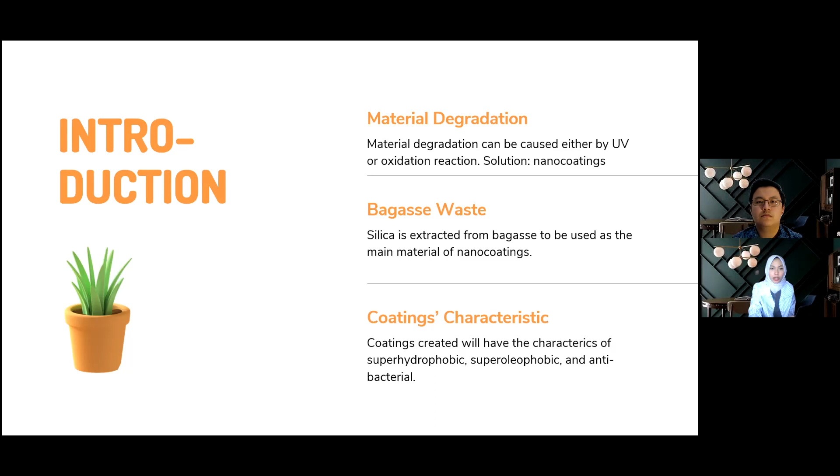In general, coatings are intended to obtain certain properties from the surface of material. Coating selection is based on its function, adaptability, level of adhesion required, availability, and also price. There are various types of coating techniques such as dip coating technique, spin coating, and also thermal spray coating. The dip coating technique is a coating method where a substrate is dipped and withdrawn vertically from the coating solution

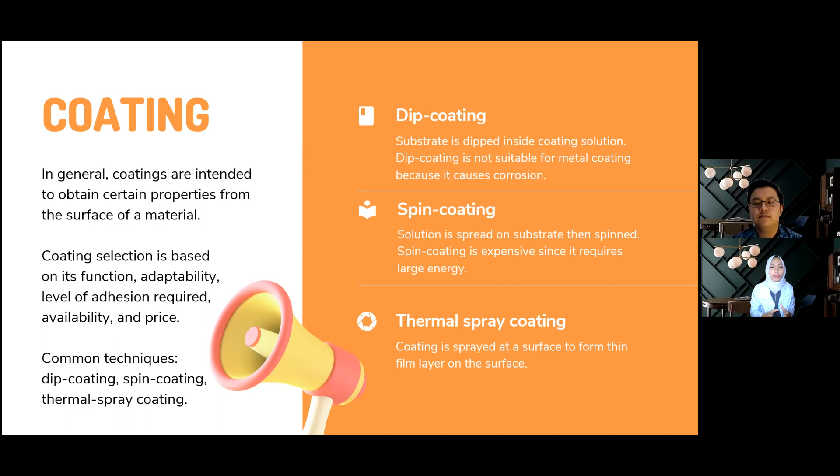at a certain speed. While spin coating is a method for depositing a thin layer by first spreading coating solution onto a substrate. While thermal spray coating is a process in which a material in the form of metal powder or wire is deposited in a liquid state on a surface that has been previously prepared to form a spray layer.

In general, wetting and adhesion interaction between water and surface can be classified into two types. First, hydrophobic, and second, hydrophilic interaction. Hydrophobic comes from the words hydro, or water, and phobia, or dislike, a nature that is not able to absorb and accept water. Meanwhile, the word hydrophilic comes from the words hydro, or water, and phil, or like, a property that is able to absorb and interact with water.

This paper recommends the use of silica as a coating material. Silica has the potential to be used as a coating material since it has good adhesion and good protective properties, making it possible to resist the diffusion of water vapor, ions, and oxygen to the metal surface. So, silica can protect the metal from corrosion.

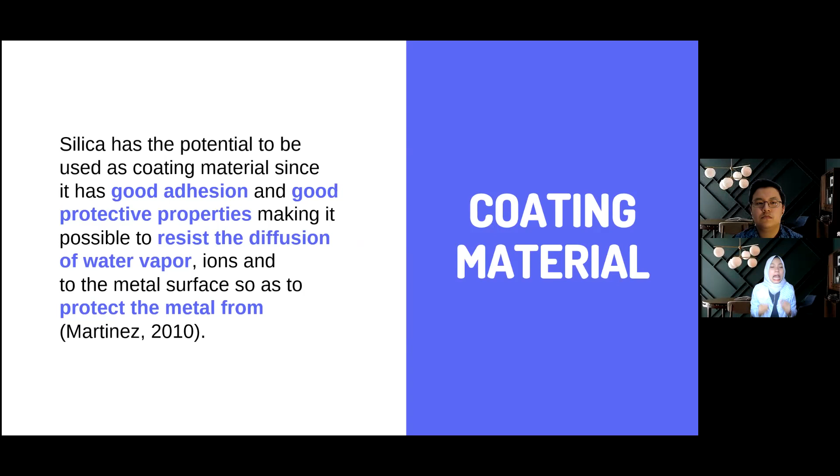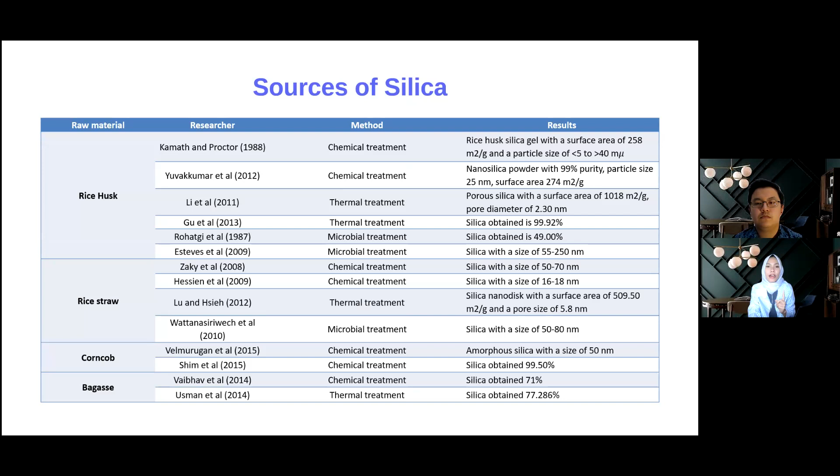This table summarizes the silica source, researchers, method, and silica isolation process results previously carried out. This paper recommends the use of bagasse as a source of silica. As you can see, the bagasse can produce silica up to 77%. There are three methods to isolate silica from bagasse. The first method is base extraction. The second method is co-precipitation. And the third method is solid-liquid extraction.

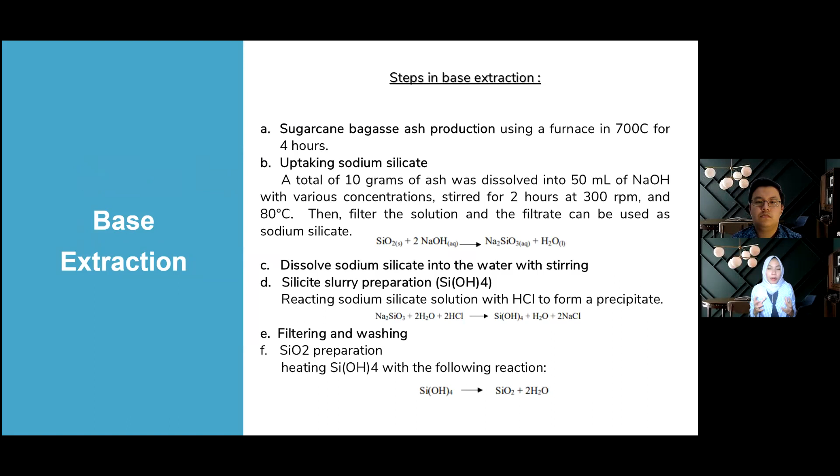Steps in base extraction include bagasse ash production, obtaining sodium silicate, dissolving sodium silicate into the water with stirring, silica slurry preparation, filtering and washing, and also silica preparation. Let's move to the second method. The second method is co-precipitation. The co-precipitation method is a method of synthesizing inorganic compounds based on the deposition of more than one substance together when they pass through their saturation point.

Co-precipitation is a promising method because the process uses low temperature and requires a shorter time, at around 12 hours. This method has so many advantages, such as low temperature condition, short time required, using easily available tools and also material, and also this method can synthesize flexibly.

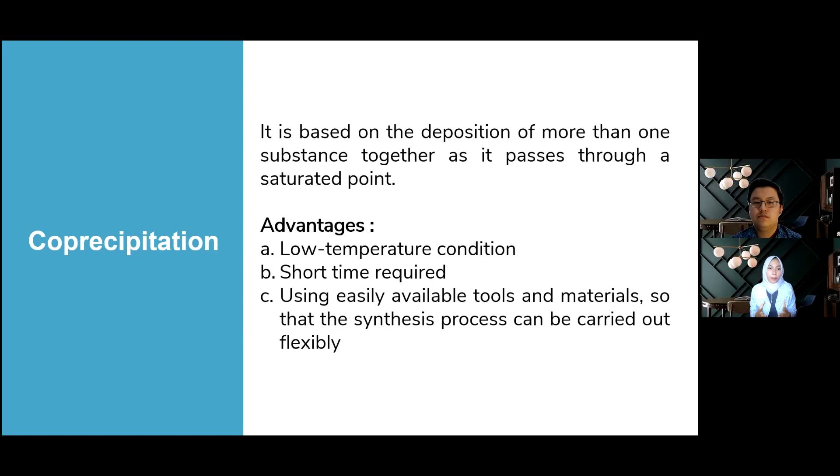The third method is solid-liquid extraction. Extraction of silica from bagasse can be carried out by a liquid-solid extraction process using an alkaline solution as a solvent. The silica compound that is formed is still in the form of potassium silicate solution. Hence, the solution is added with 1 N hydrochloric acid, which is used to bind potassium and produce silica.

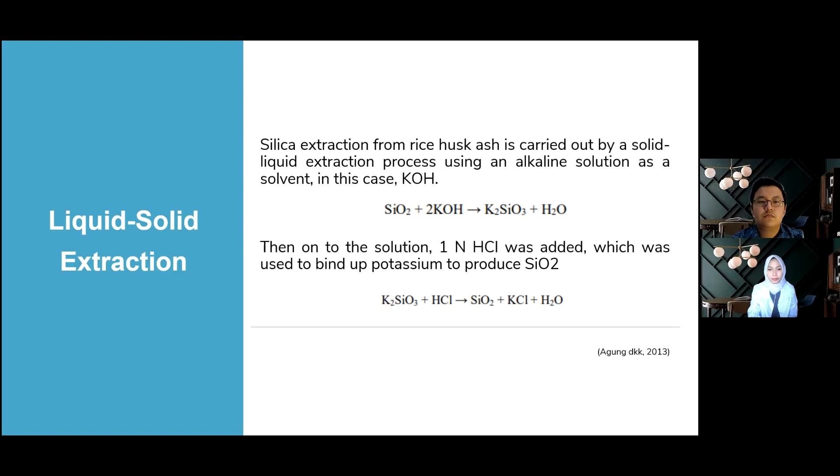Besides its simplicity to be isolated, silica is also inert, hydrophilic, has thermal and mechanical stability, and is relatively non-swelling in organic solvents when compared to solid organic polymer resins. However, silica also has a disadvantage since its active sites are only silanol and siloxane functional groups. This disadvantage can be solved by doing surface modification.

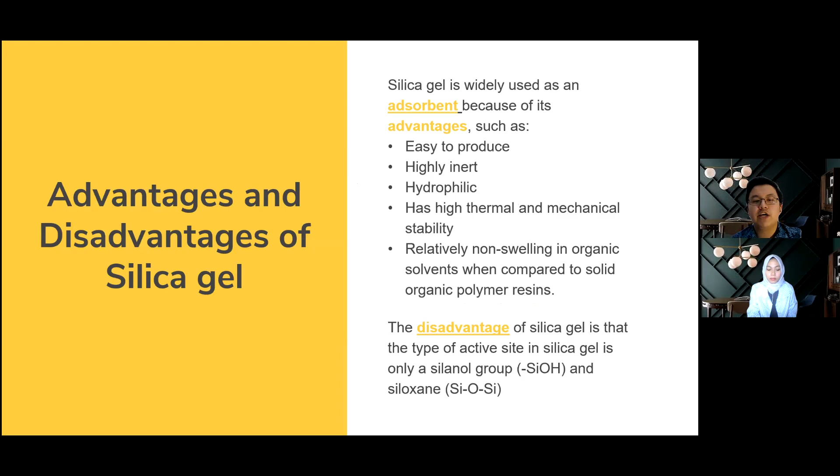The main purpose of surface modification is to change the chemical composition of the surface. Surface modification is done by changing the hydrogen atom in the silanol group into atoms other than hydrogen. The functional groups at the silica gel surface can be modified by impregnation or forming covalent bonds. In order to modify the active site, a substance called a modifier is used.

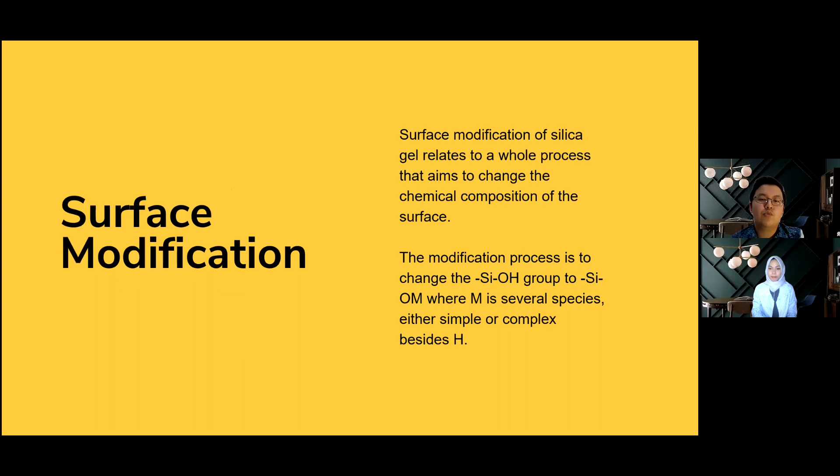An alternative modifier that can be used is vinyltriethoxysilane, or VTES. It has 3 hydrolyzable ethoxy functional groups and 1 vinyl functional group that are attached to the silicon atom. Vinyl groups added to silicon can improve the elastic and mechanical properties without much variation in density or thermal conductivity. The addition of VTES can also make the distribution of nanoparticles more uniform.

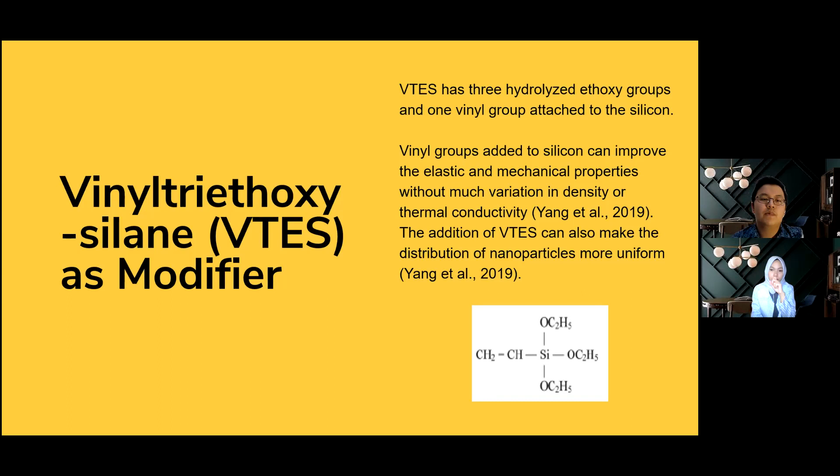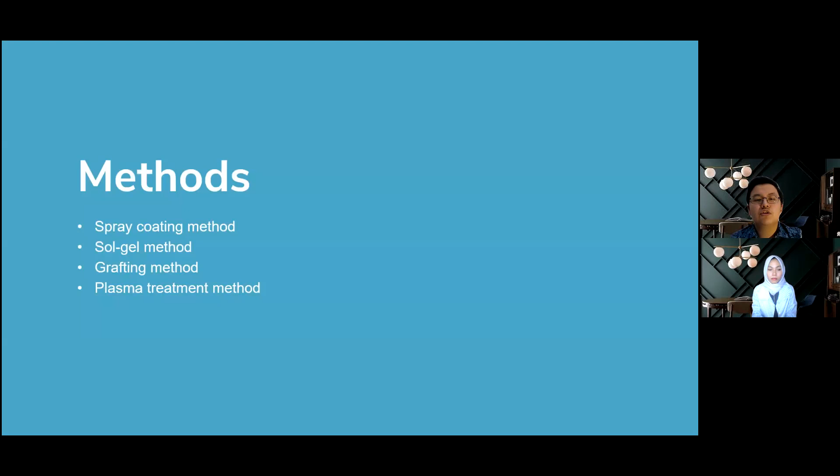There are several modification methods that can be used, such as the spray coating, sol-gel, grafting, and plasma treatment method. The spray coating and sol-gel methods are shown to be simple and effective ways, while in the grafting method, double bonds and branched nanosilica are covalently grafted to the surface. In plasma treatment, polymer surface properties are improved by applying reactive gases, plasmas.

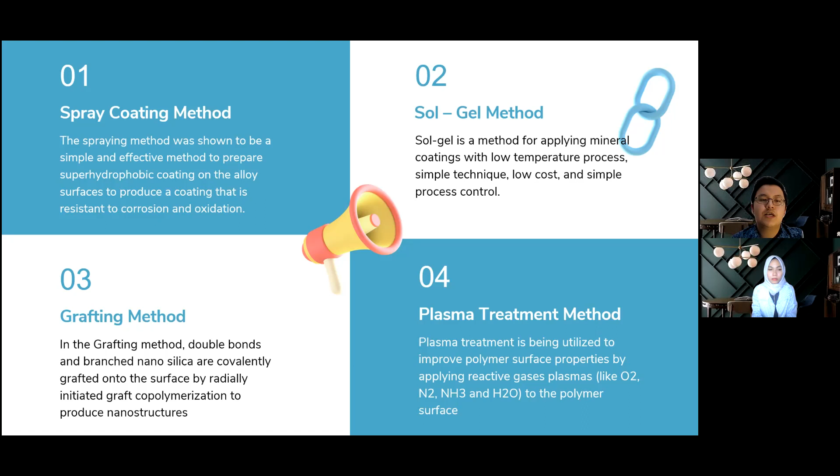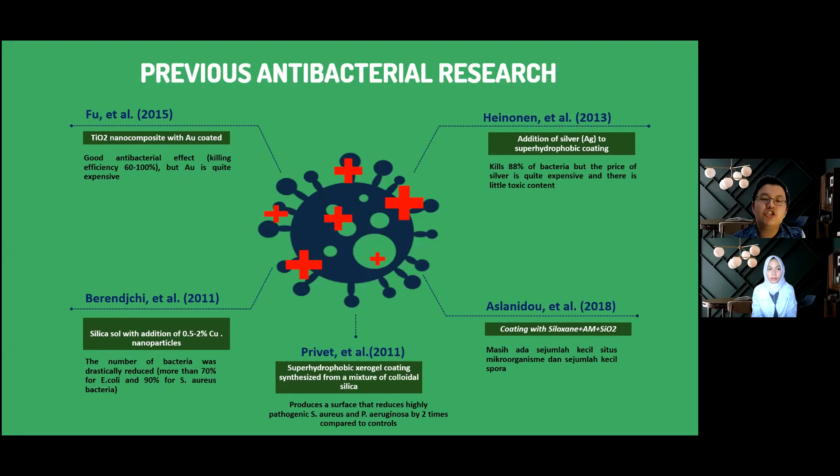Besides modifying the active sites, another innovation can also be done by adding an antibacterial substance. The addition of antibacterial substance aims to kill or inhibit the growth of bacteria. There is abundant research to find the best antibacterial substance. Probably the best and the most widely used antibacterial substance is cupric ions. Cupric ions have high antibacterial activity and are inexpensive.

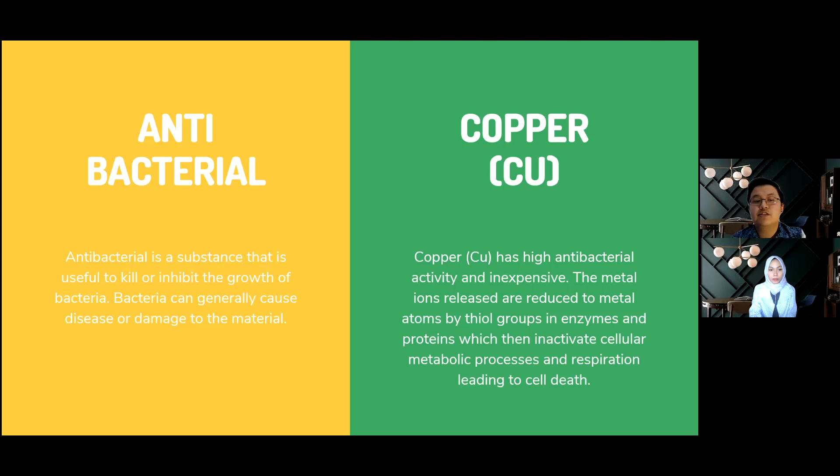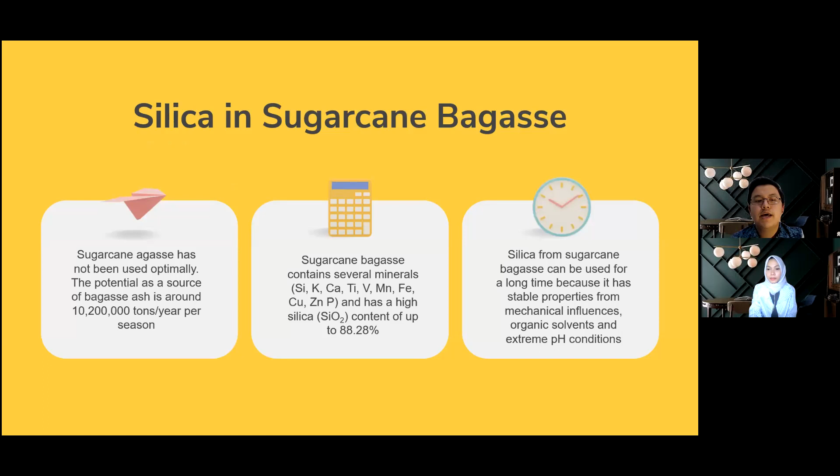The results of the review are, first, sugarcane bagasse has not been used optimally. However, the bagasse has a high silica content that can be used to produce a high-quality superhydrophobic and superoleophobic coating, since the silica is stable in various conditions. Second, the addition of VTES to modify the silica gel may improve the elastic, mechanical, and nanoparticle distribution properties of silica gel, which results in an increase of the coating superhydrophobicity.

Third, the usage of cupric ions as antibacterial agent has many advantages, such as high antibacterial power, cheap price, good chemical stability, conductivity, and low toxicity. Therefore, the relatively high silica content in sugarcane bagasse can be used to produce superhydrophobic coatings. Several modifications and additions can be applied to improve the properties of the silica gel in order to make the coating superhydrophobic, superoleophobic, and also antibacterial.